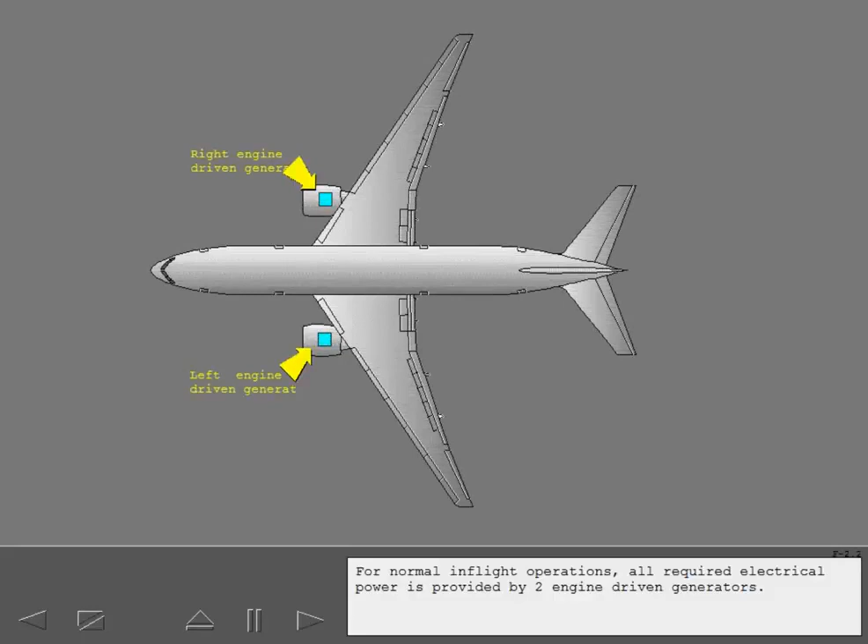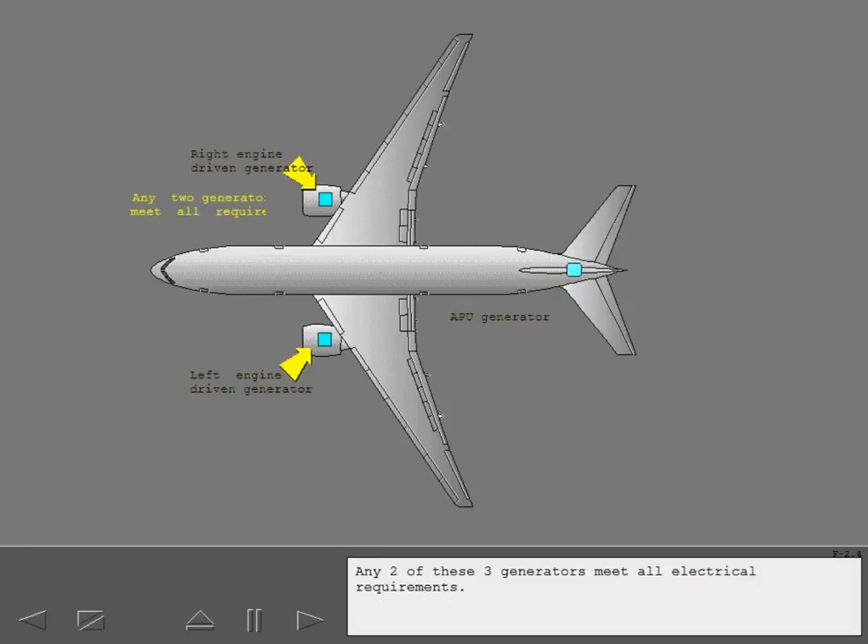For normal in-flight operations, all required electrical power is provided by two engine-driven generators. A third generator, driven by the APU, is available in flight. It is equal in size and capacity to either engine-driven generator. Any two of these three generators meet all electrical requirements.

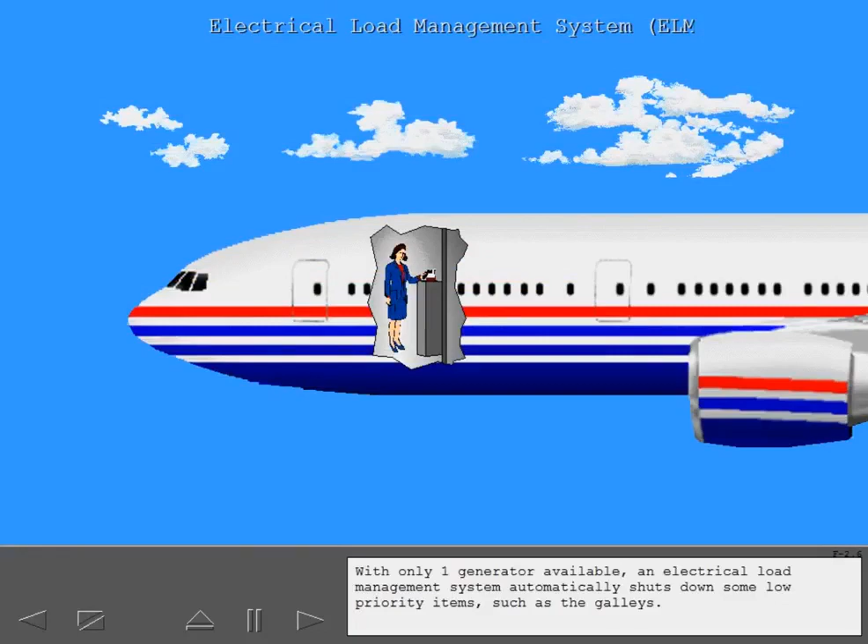With only one generator available, an electrical load management system automatically shuts down some low-priority items, such as the galleys.

Let's use the electrical synoptic to show the main electrical components. Two main AC power buses, left and right, distribute power to all airplane electrical systems. A bus tie and two isolation relays operate automatically to ensure both main buses remain powered at all times.

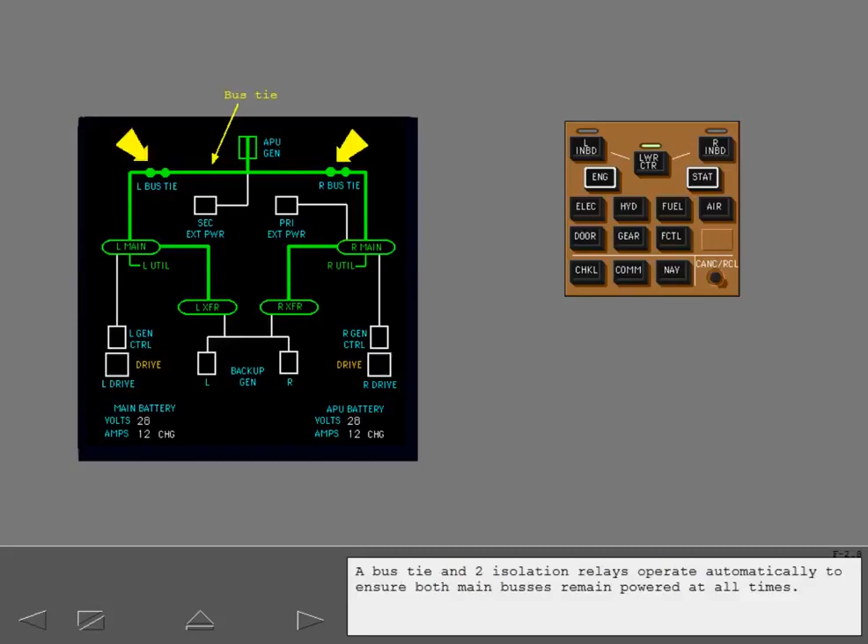Now let's operate the system. Let's begin with the airplane secured and external power disconnected.

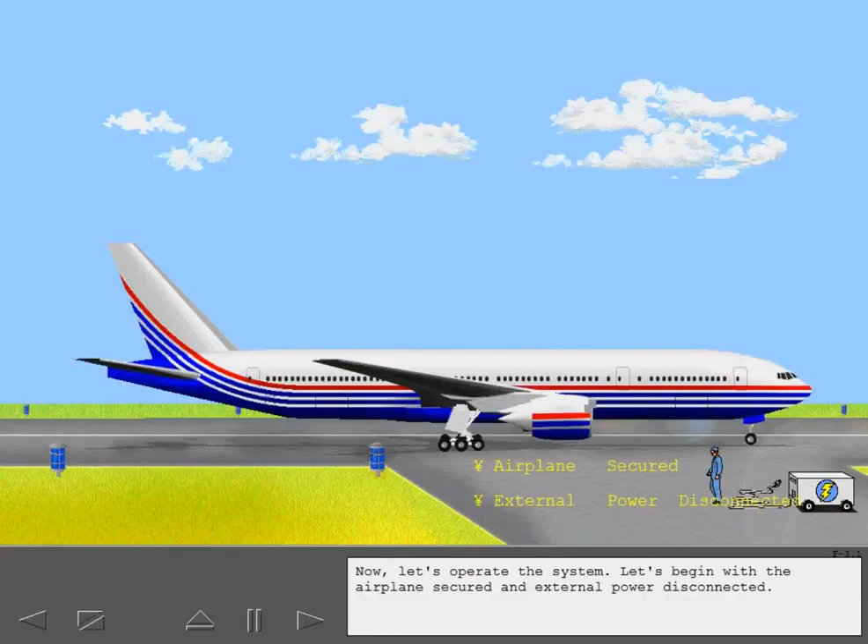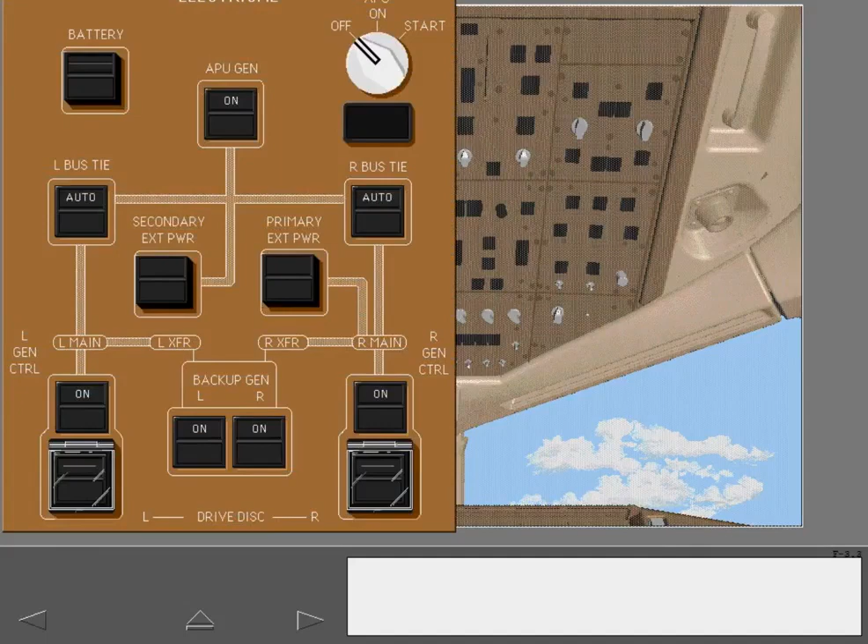Controls for the electrical system are located on the overhead panel. With all electrical power switched off, the main battery still continues to power a few important items through the hot battery bus. These include engine fire extinguisher bottles, the APU fire extinguisher bottle, and the ADIRU, as long as the ADIRU switch is on.

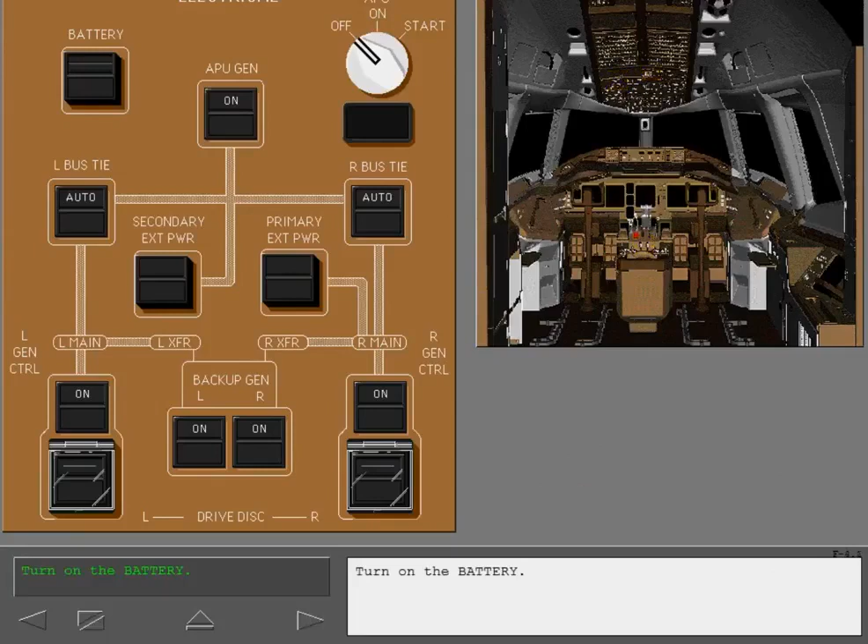Turn on the battery. The on indication in the battery switch appears, and several flight deck annunciator lights illuminate.

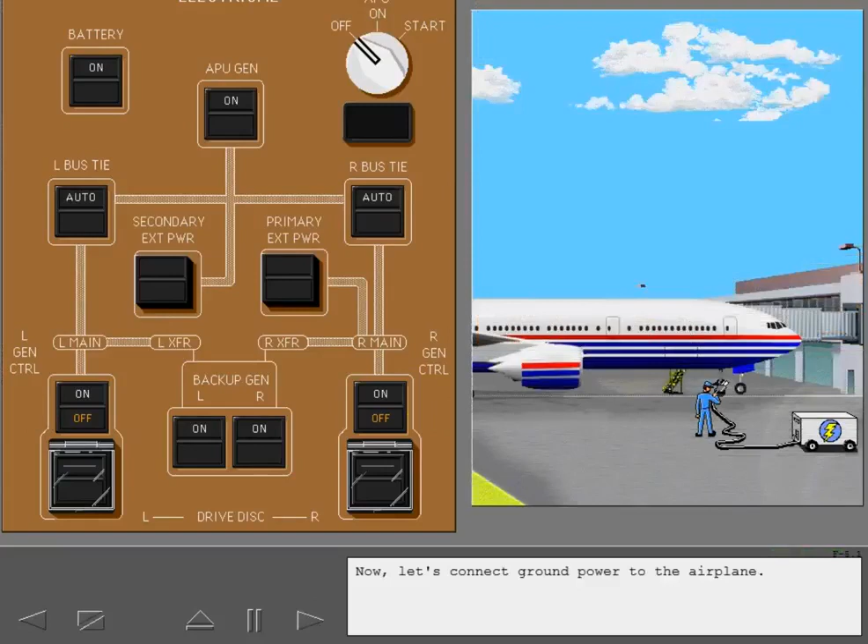Now let's connect ground power to the airplane. There are two external power switches on the electrical panel, primary and secondary. The available light indicates primary external power is connected to the airplane and is of usable quality.

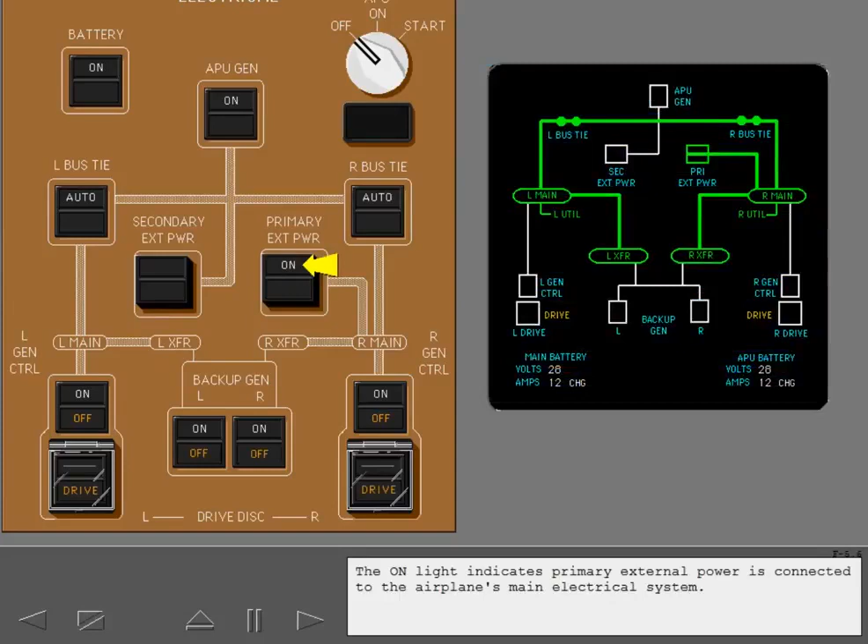Push the primary external power switch to connect external power to the main airplane electrical system. The on light indicates primary external power is connected to the airplane's main electrical system. If no other power source is available, the primary external source powers the left and right buses.

With a single external power source, some non-essential electrical items, such as the galleys, may be unpowered if loads are high.

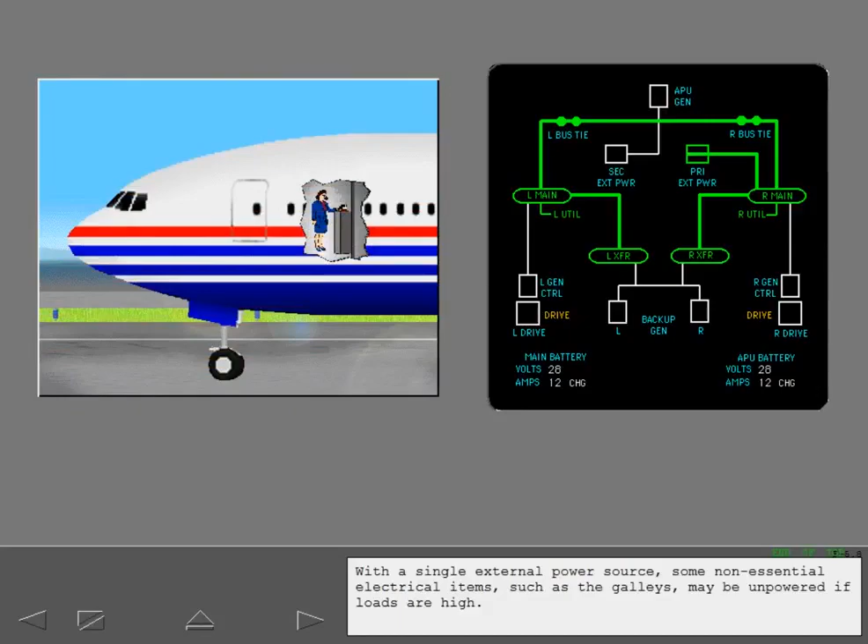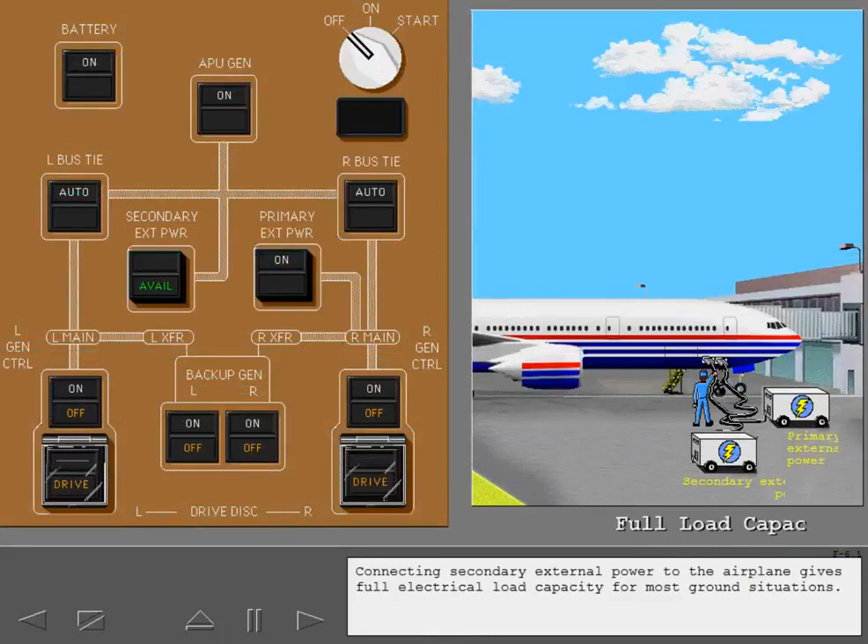Connecting secondary external power to the airplane gives full electrical load capacity for most ground situations. When secondary external power is available and of usable quality, the available light illuminates. Connect secondary external power. Notice the on light illuminates and the available light extinguishes when secondary external power is connected.

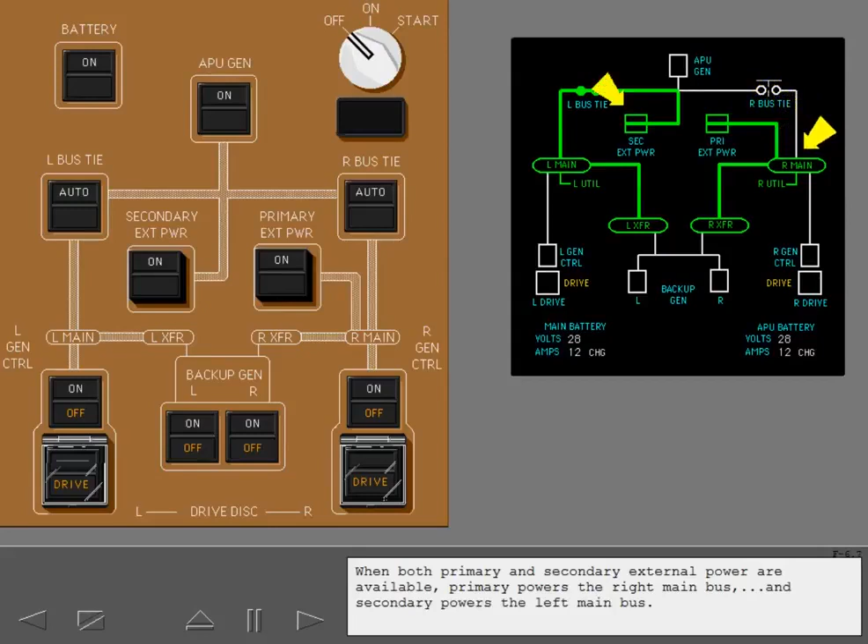When both primary and secondary external power are available, primary powers the right main bus, and secondary powers the left main bus. Any two power sources support full electrical loading.

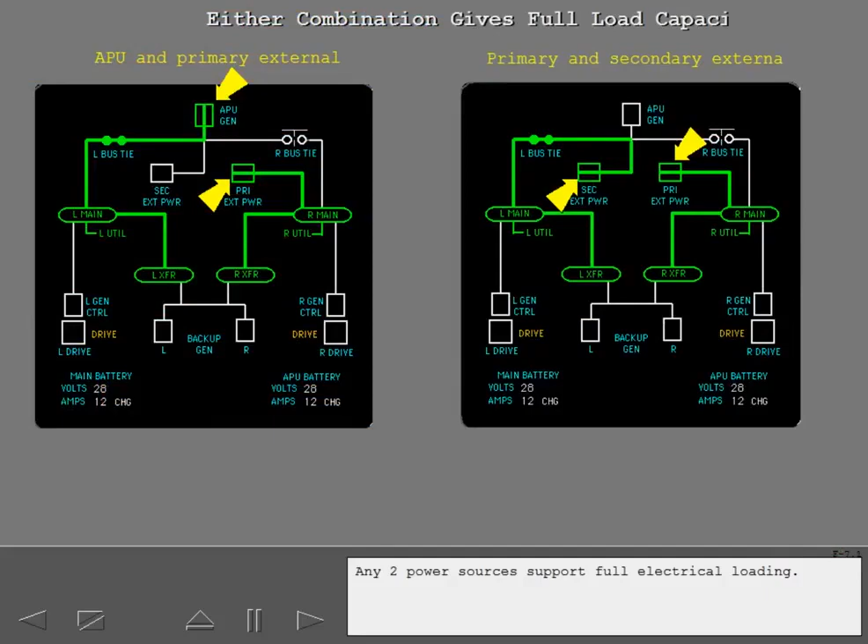In this example, the APU is running but not connected. Let's connect the APU generator to the system. Push the APU generator switch to the on position.

Notice that APU power replaces secondary external power. The external power switch changes to available.

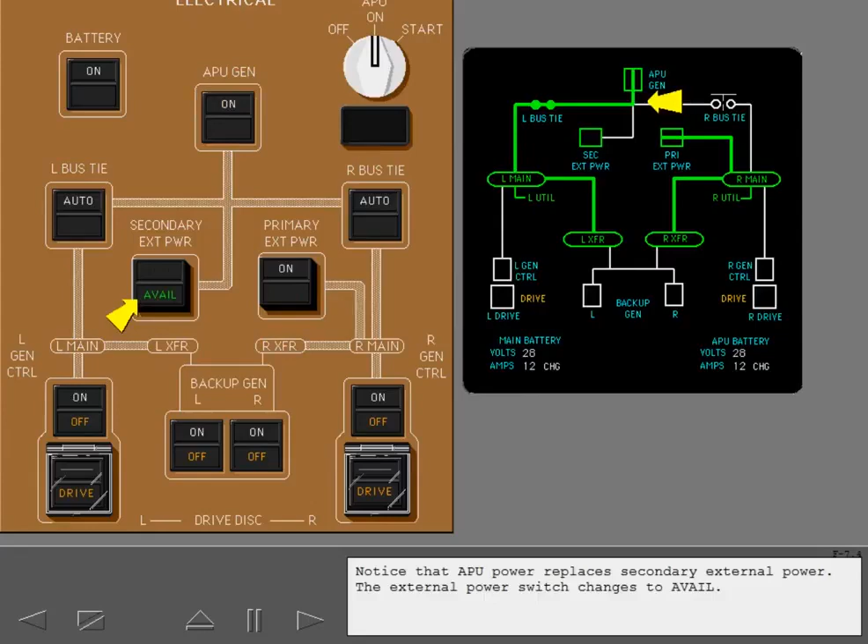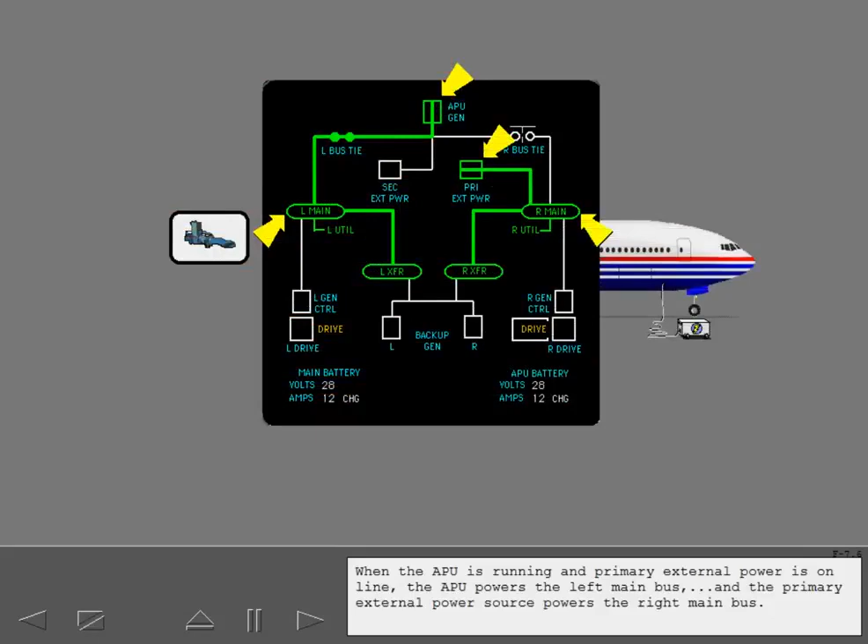When the APU is running and primary external power is online, the APU powers the left main bus, and the primary external power source powers the right main bus.

The APU generator switch is normally left in the on position at all times. In the on position, the APU generator breaker opens and closes automatically.

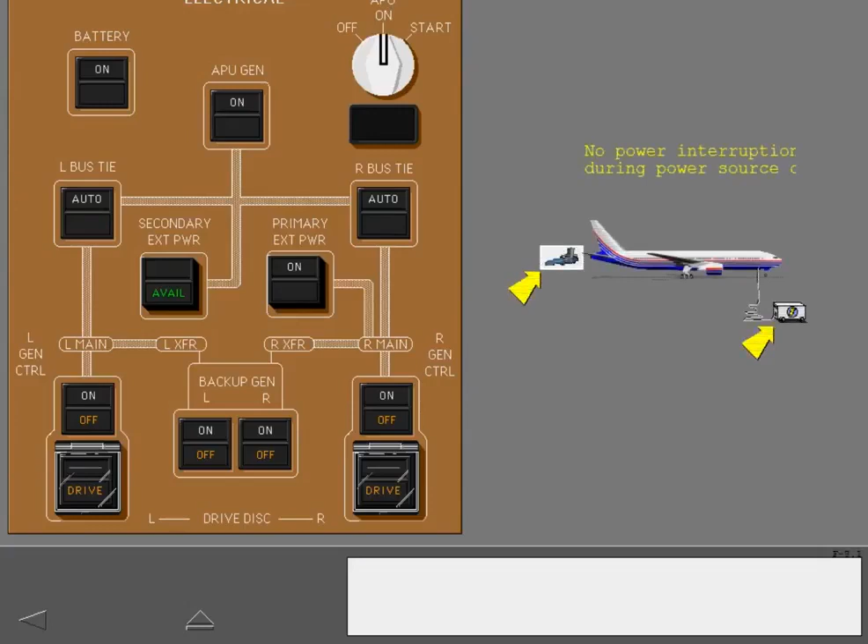There is no interruption of power when switching power sources, except when switching between two external sources.

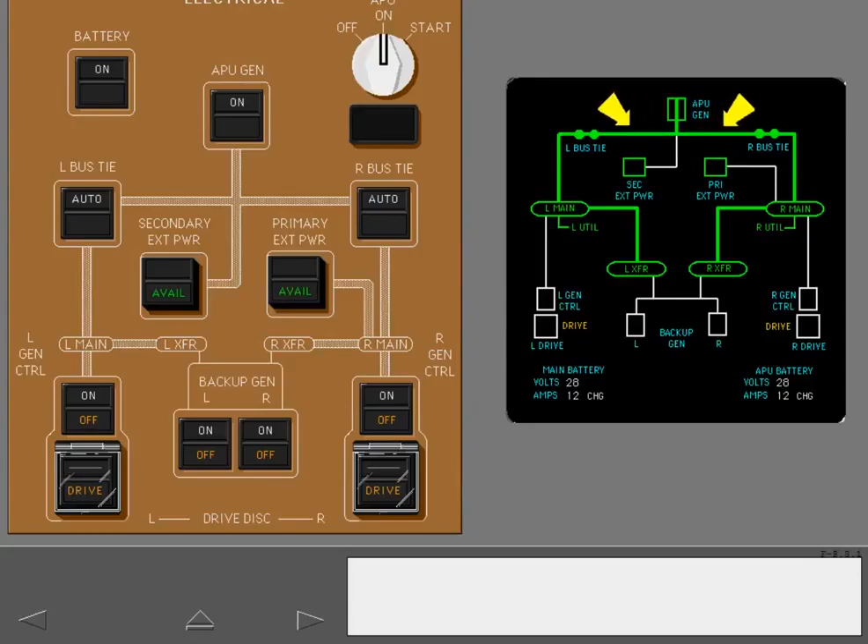Remove primary external power. Notice the primary external power switch changes to available. The APU now powers both buses.

With only one power source, the electrical load management system again sheds non-essential electrical loads.

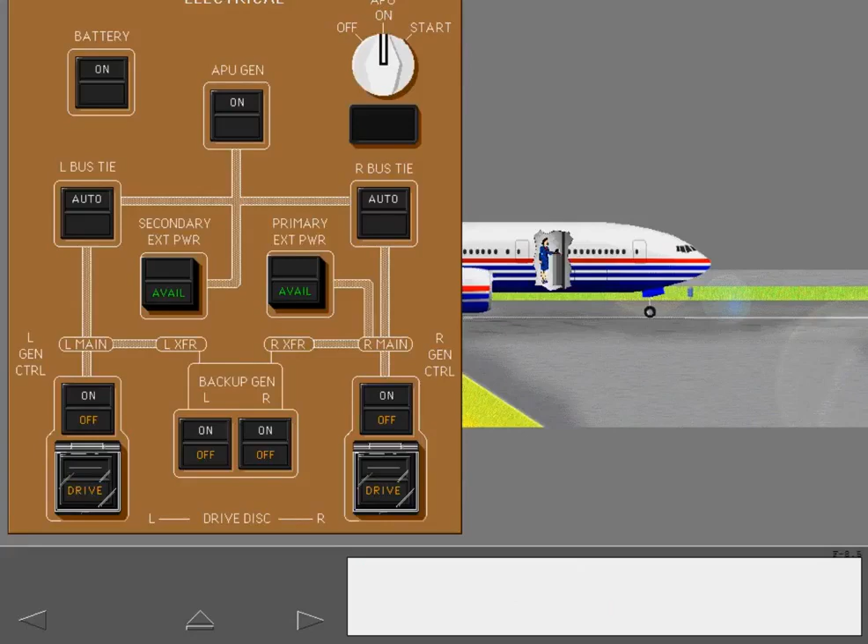Re-establish primary external power. Re-establish secondary external power. The only indication of the change from APU power to external power is the available annunciation changing to an on annunciation in the external power switches.

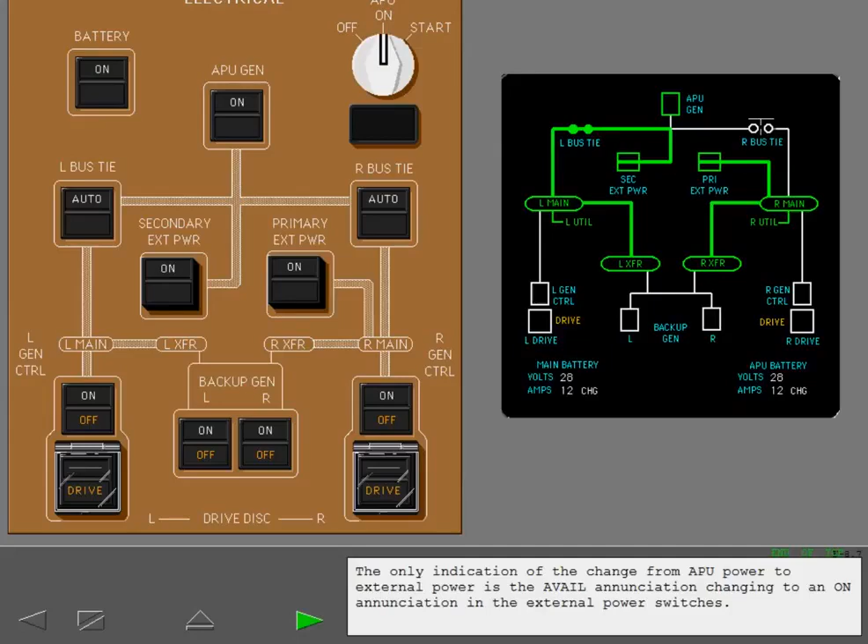Each main engine generator and its drive unit are housed in a single case and share a common oil supply. This combined unit is called an Integrated Drive Generator, or IDG. Each IDG is controlled by a generator control unit, which provides automatic control functions and system protection.

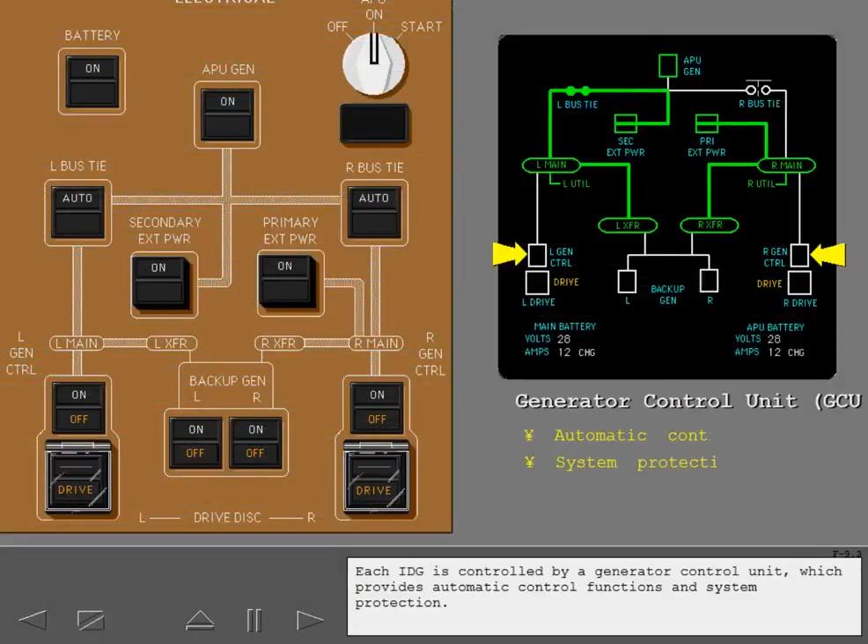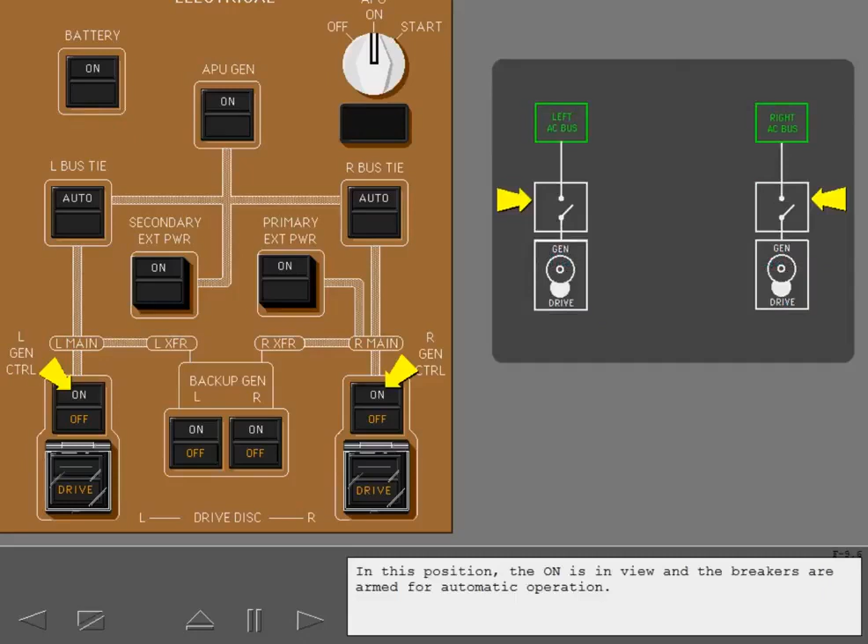The generator control switches automatically connect the IDG to the main buses. The generator control switches remain in the on position for all normal operations. In this position, the on is in view and the breakers are armed for automatic operation.

The off light illuminates when the breaker is open. Note this is different than the APU switch, which only illuminates with a fault or when the switch is turned off.

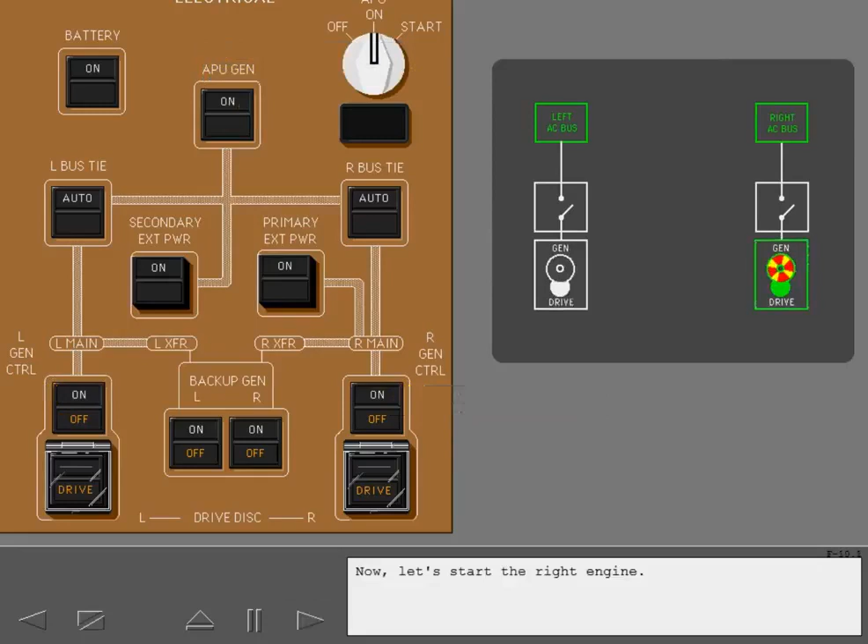Now let's start the right engine. The IDG begins to rotate to operating speed.

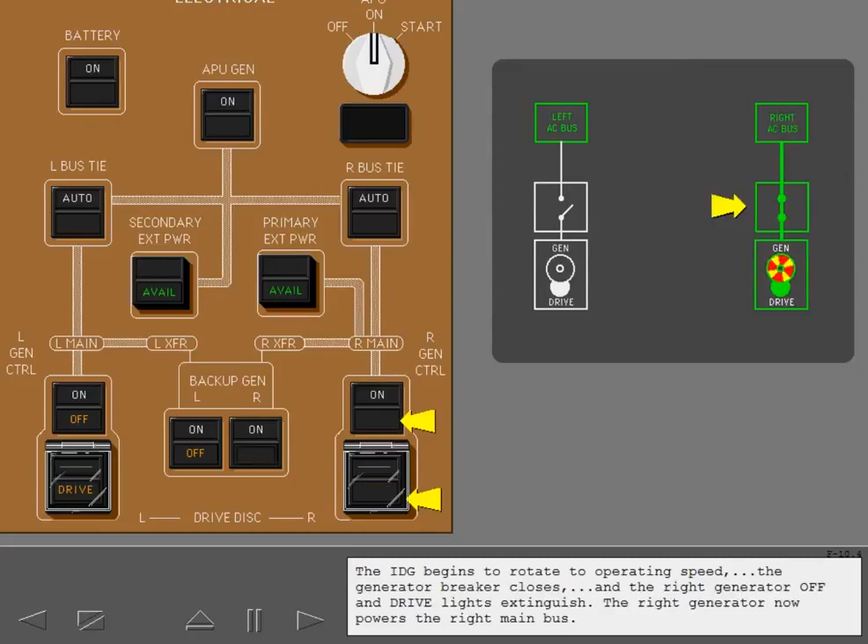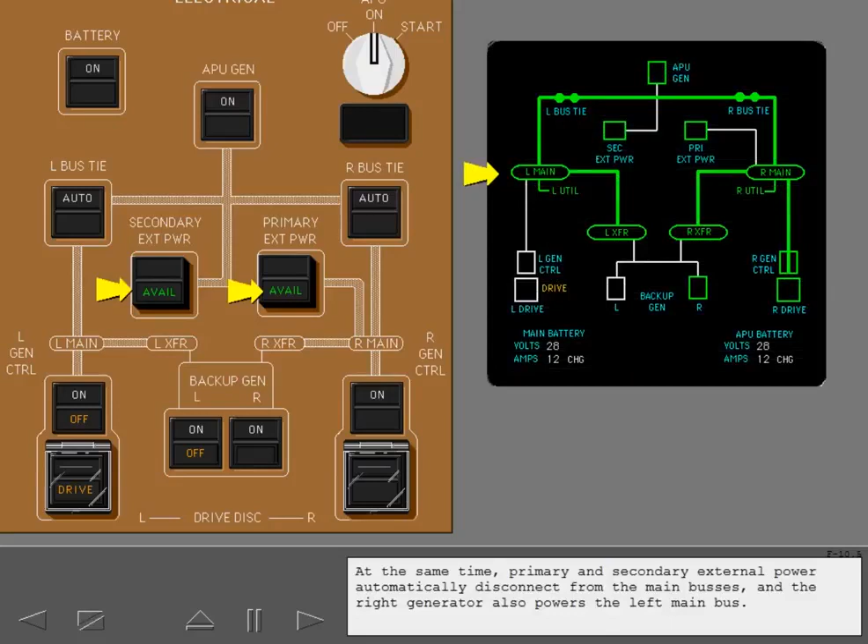The generator breaker closes, and the right generator off and drive lights extinguish. The right generator now powers the right main bus. At the same time, primary and secondary external power automatically disconnect from the main buses, and the right generator also powers the left main bus.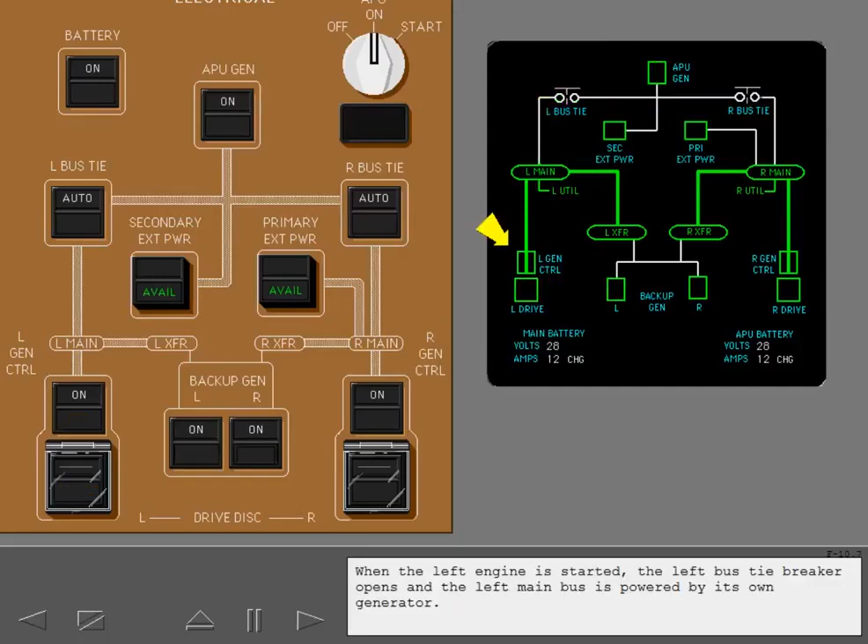After a few seconds with the APU running, APU power replaces right generator power on the left main bus. When the left engine is started, the left bus tiebreaker opens and the left main bus is powered by its own generator.

Each main AC bus powers one utility bus. There are no switches for the utility buses.

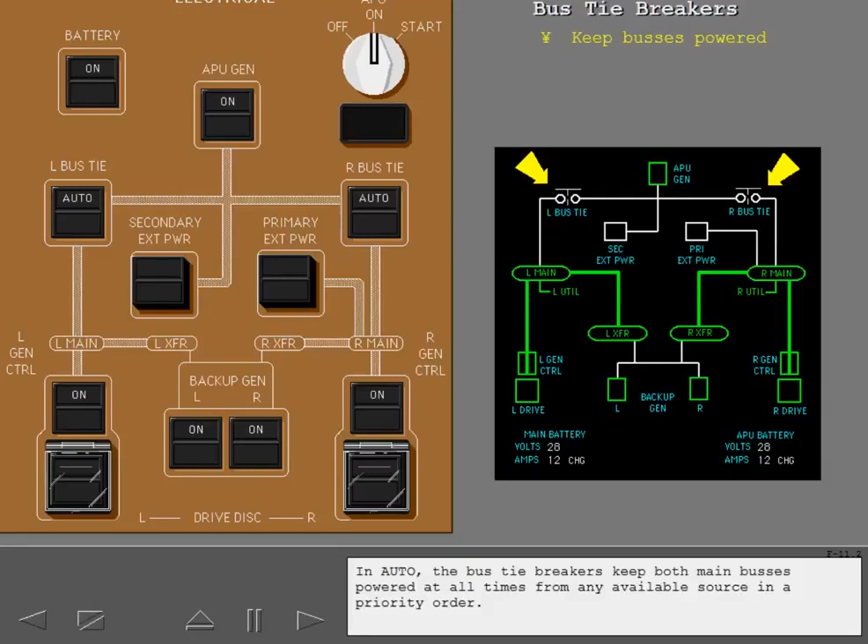For normal operation, the bus tie switches are left in auto. In auto, the bus tie breakers keep both main buses powered at all times from any available source in a priority order.

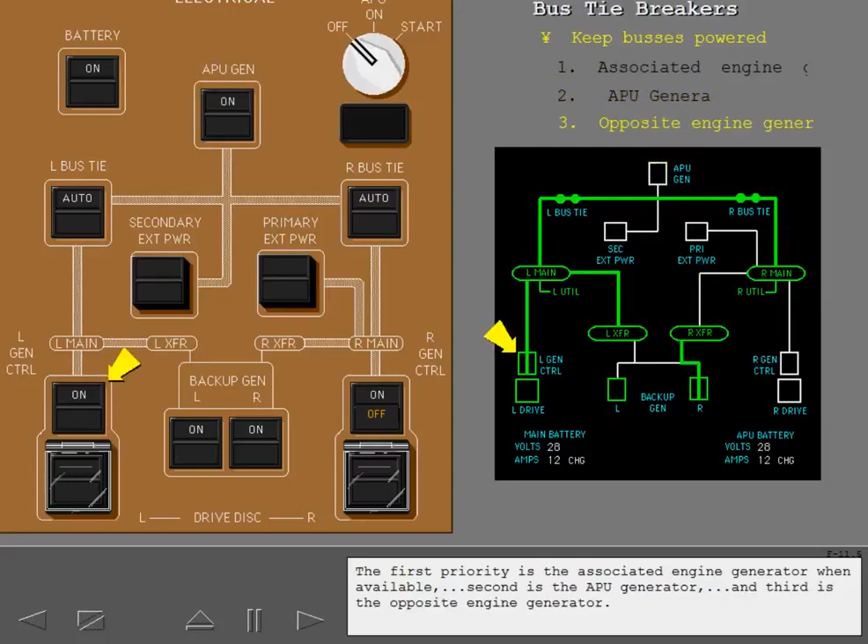The first priority is the associated engine generator when available. Second is the APU generator. And third is the opposite engine generator.

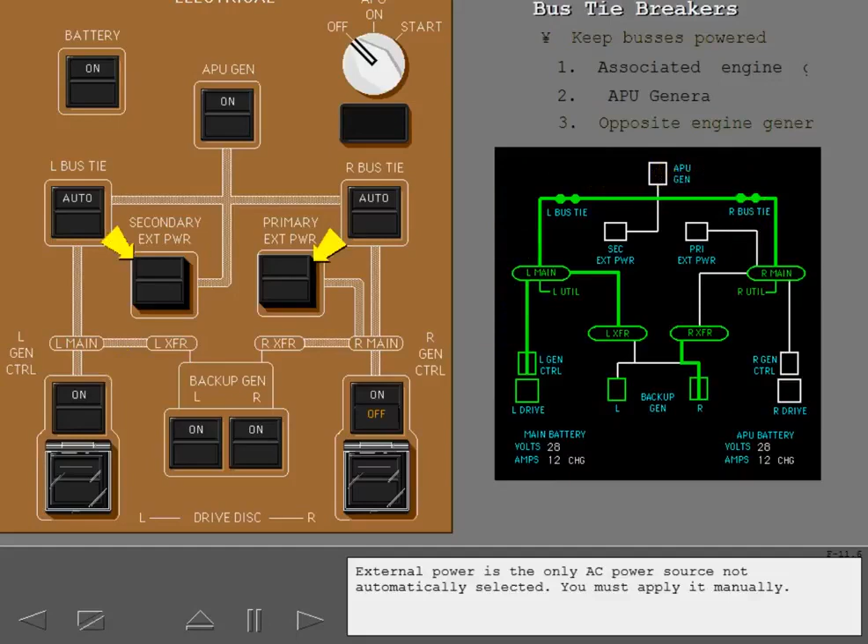External power is the only AC power source not automatically selected. You must apply it manually. Note that both bus tiebreakers are open whenever the IDGs are powering their respective buses.

Push the left bus tie switch to position it off. Notice the auto annunciation disappears and the isolation light illuminates. The left bus tiebreaker is locked open with the switch off.

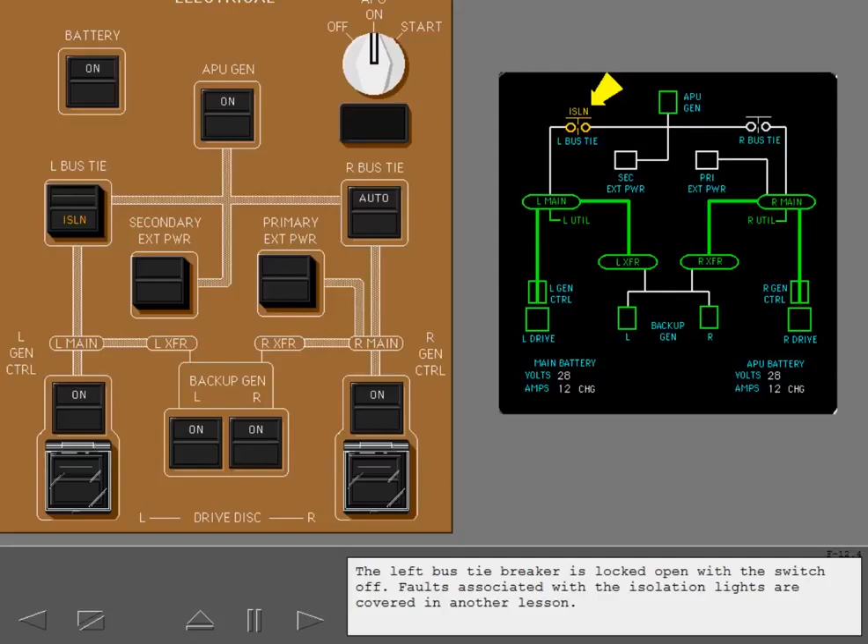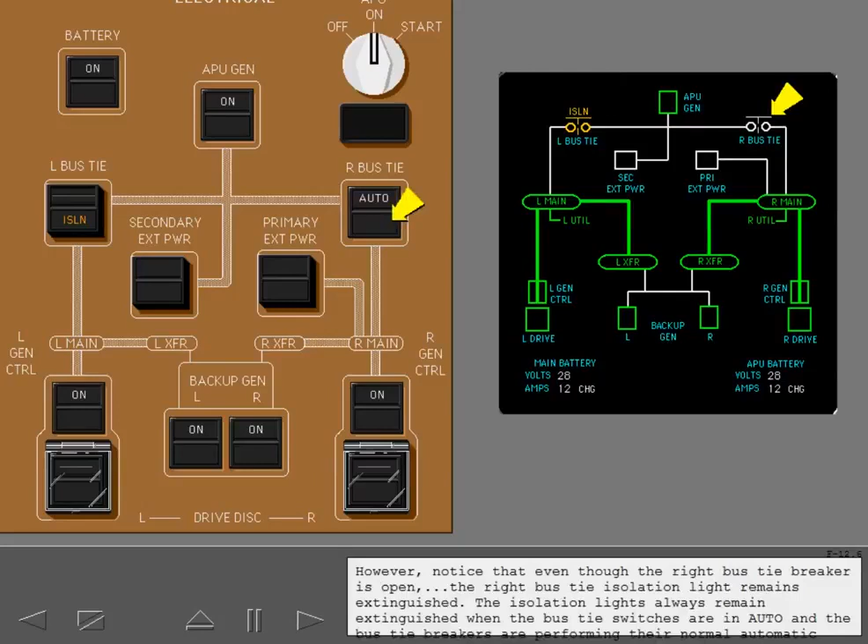Faults associated with the isolation lights are covered in another lesson. However, notice that even though the right bus tiebreaker is open, the right bus tie isolation light remains extinguished. The isolation lights always remain extinguished when the bus tie switches are in auto and the bus tie breakers are performing their normal automatic operation.

Reset the left bus tie switch and notice that auto is again annunciated. Both engines are now running and both engine generators are powering their associated bus. The only indication on the electrical panel is that the generator off lights and generator drive lights are extinguished.

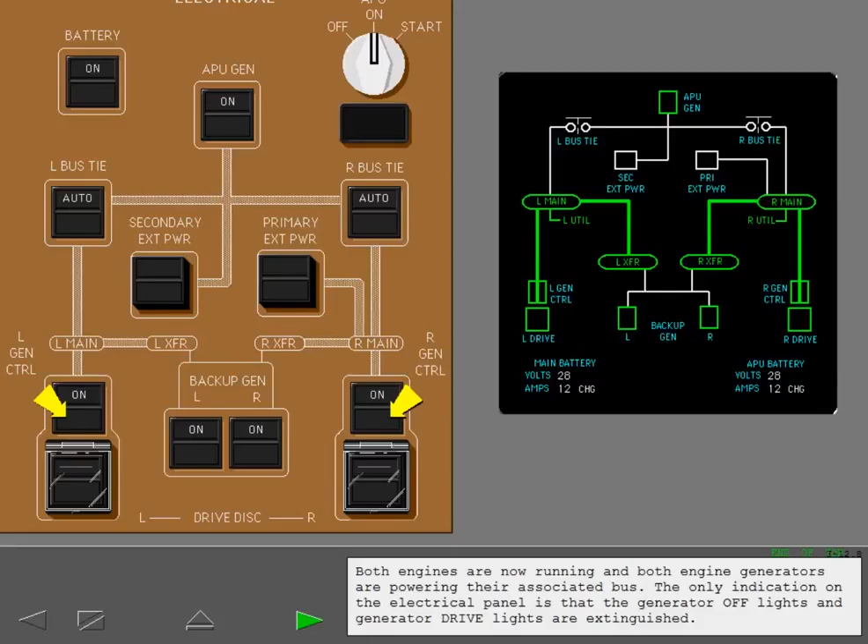The electrical panel is now configured for flight. External power is disconnected. Notice in this normal flight configuration, all electrical panel lights are extinguished. The APU may be shut down.

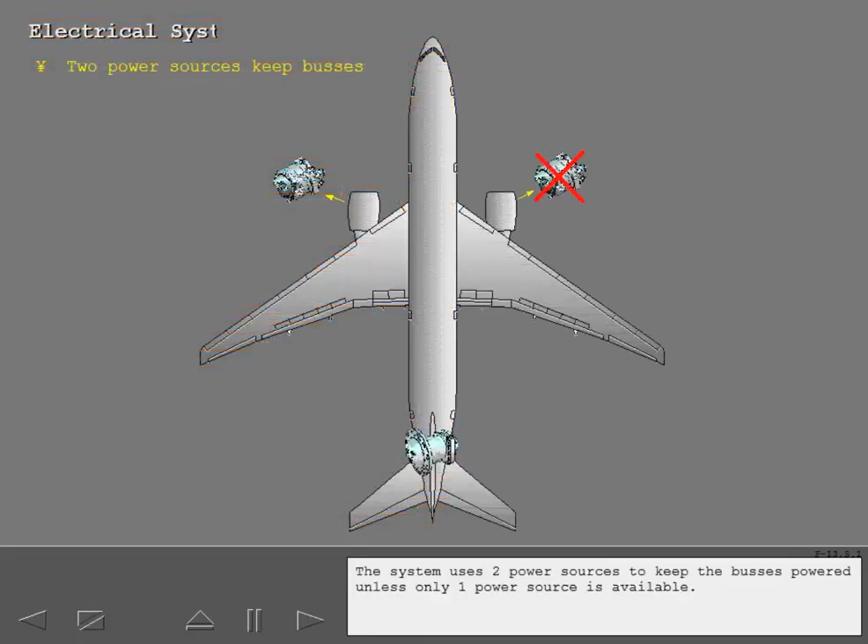The system uses two power sources to keep the buses powered unless only one power source is available. Any one generator has sufficient capacity to supply all essential flight loads.

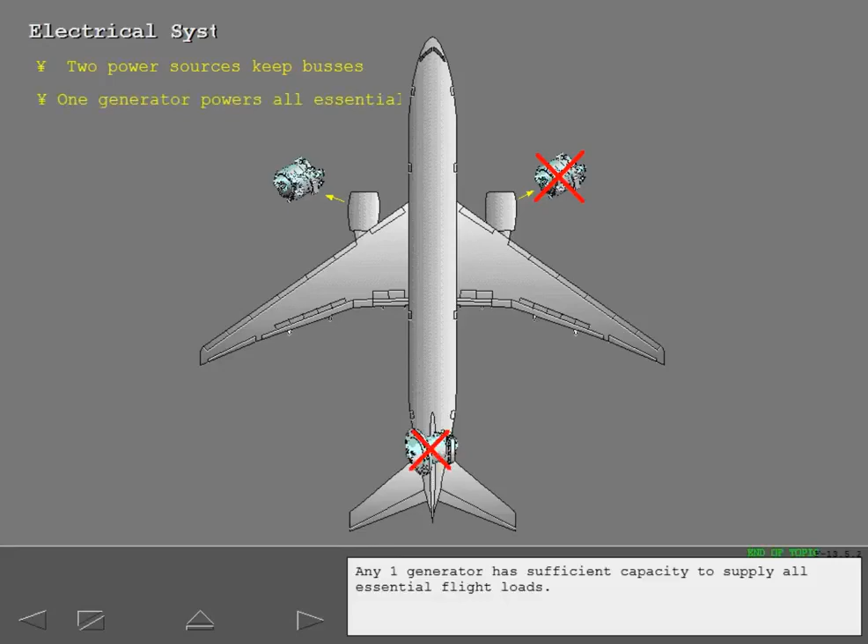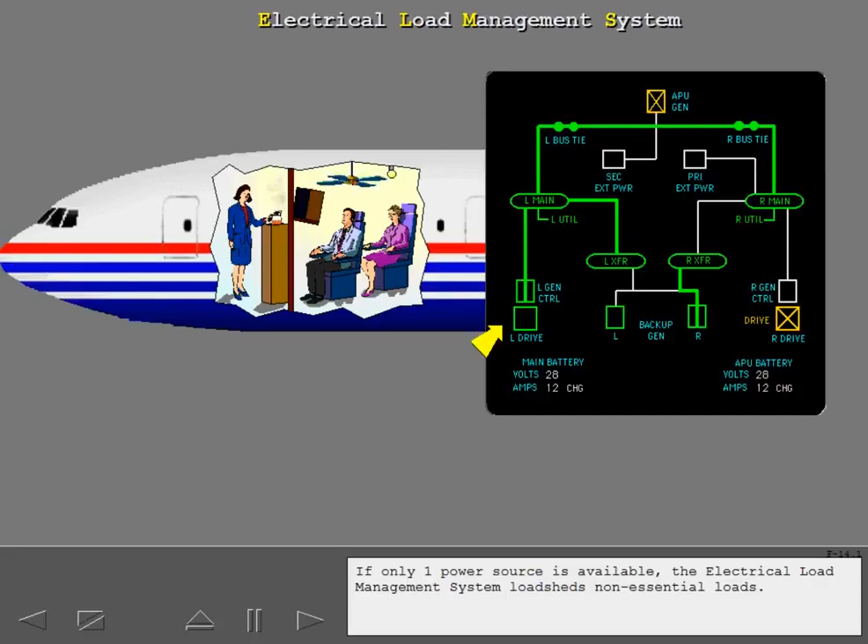If only one power source is available, the electrical load management system load sheds non-essential loads. First, galleys and galley chiller loads are shed, and then left and right utility buses. The utility buses power passenger entertainment systems and recirculating fans.

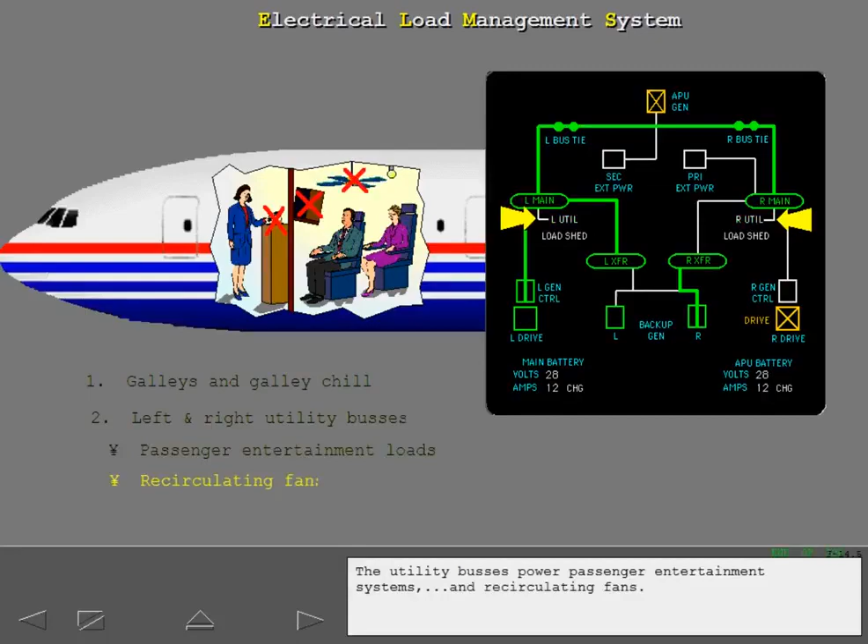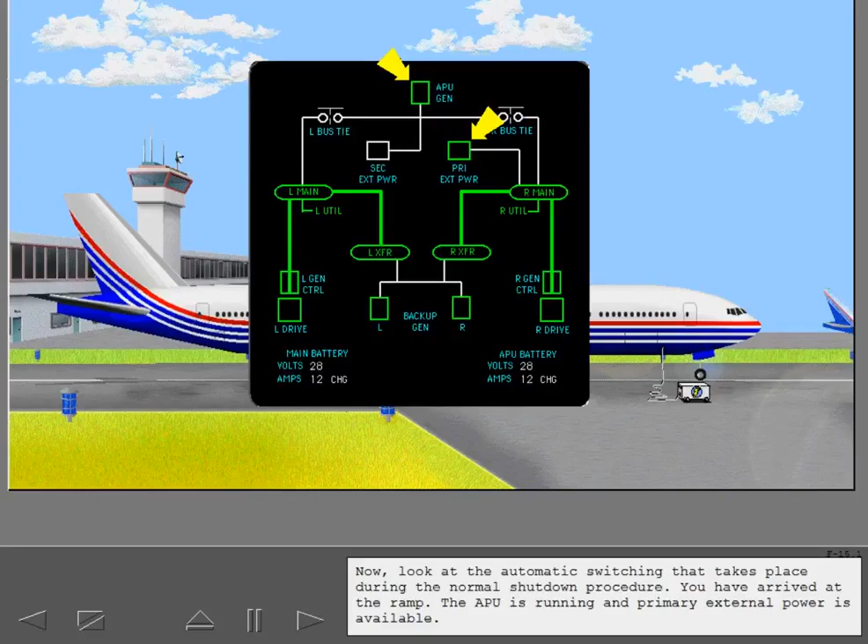Now look at the automatic switching that takes place during the normal shutdown procedure. You have arrived at the ramp. The APU is running and primary external power is available. Let's shut down the left engine.

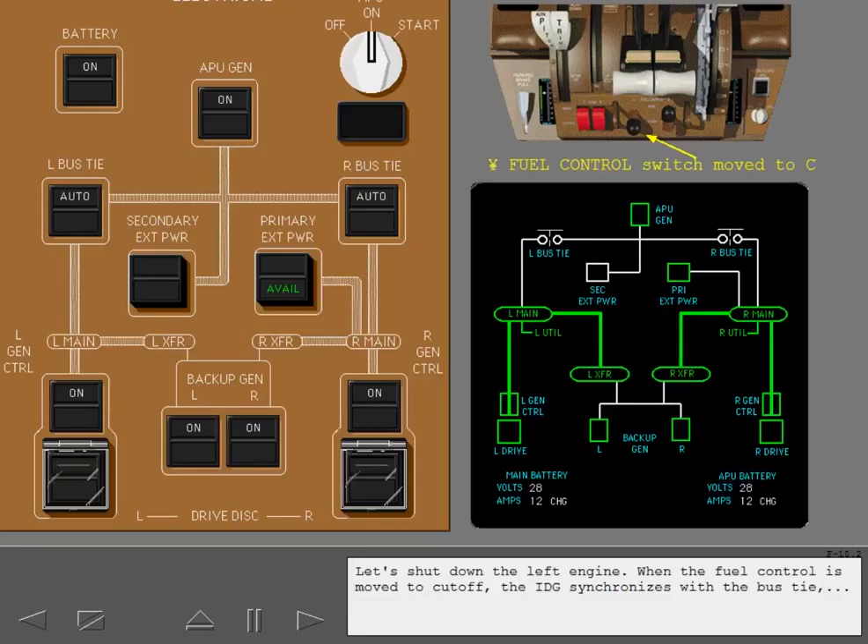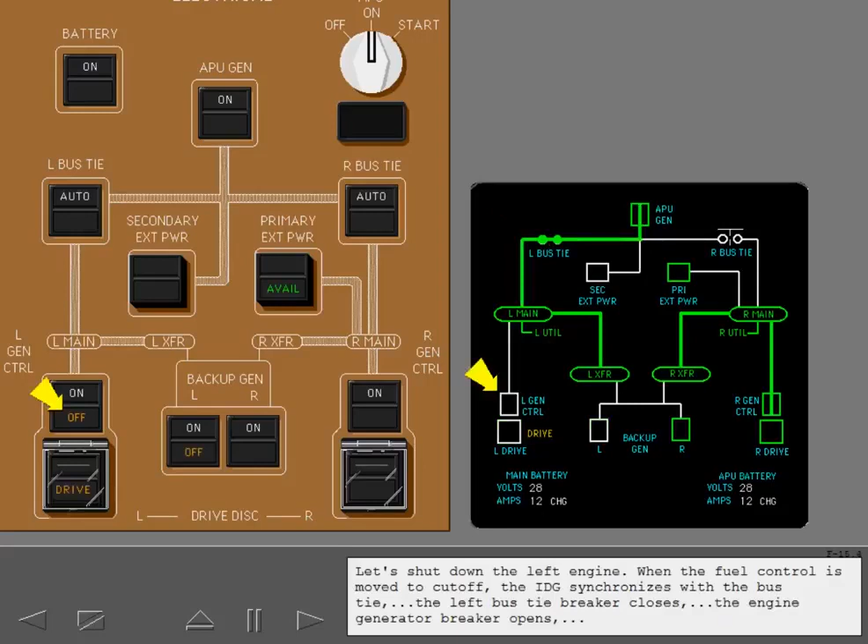When the fuel control is moved to cutoff, the IDG synchronizes with the bus tie. The left bus tie breaker closes, the engine generator breaker opens, and the APU powers the left bus.

The right bus is still powered by the right engine generator. When the right engine is shut down, the right bus tie breaker closes, and the APU automatically powers the right main bus.

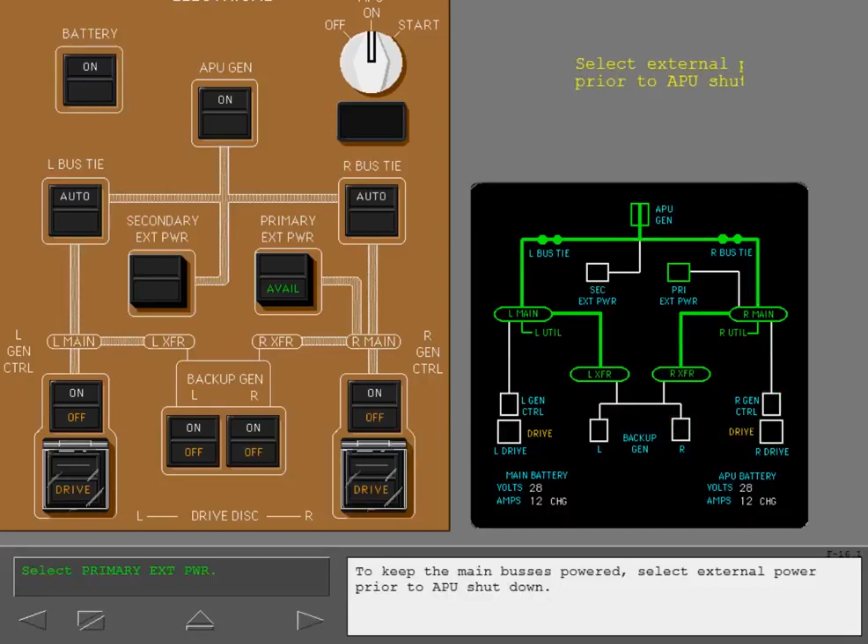To keep the main buses powered, select external power prior to APU shutdown. Notice that primary external power now powers the right main bus, and the APU continues to power the left main bus. Now turn the APU off.

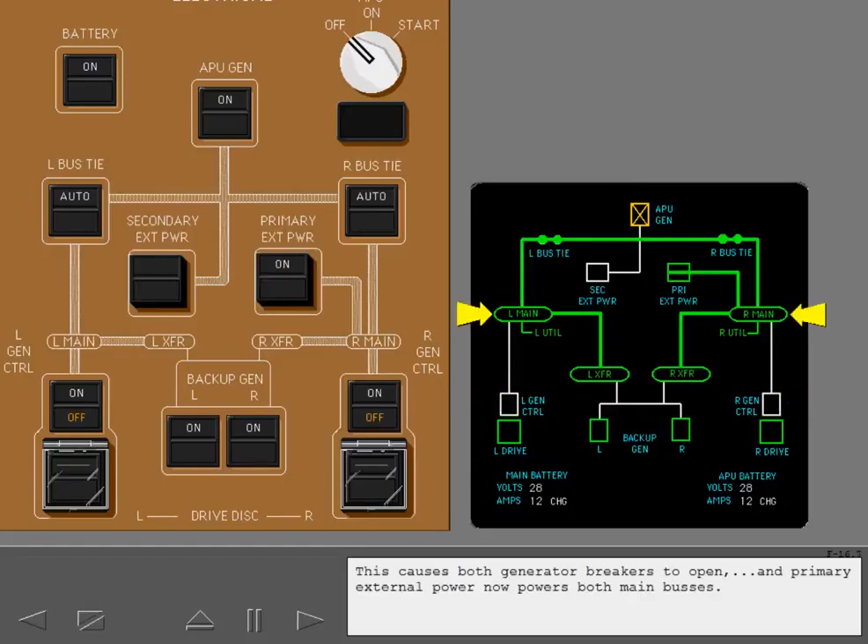If the APU is not available, select primary external power prior to engine shutdown. Select primary external power. This causes both generator breakers to open, and primary external power now powers both main buses.

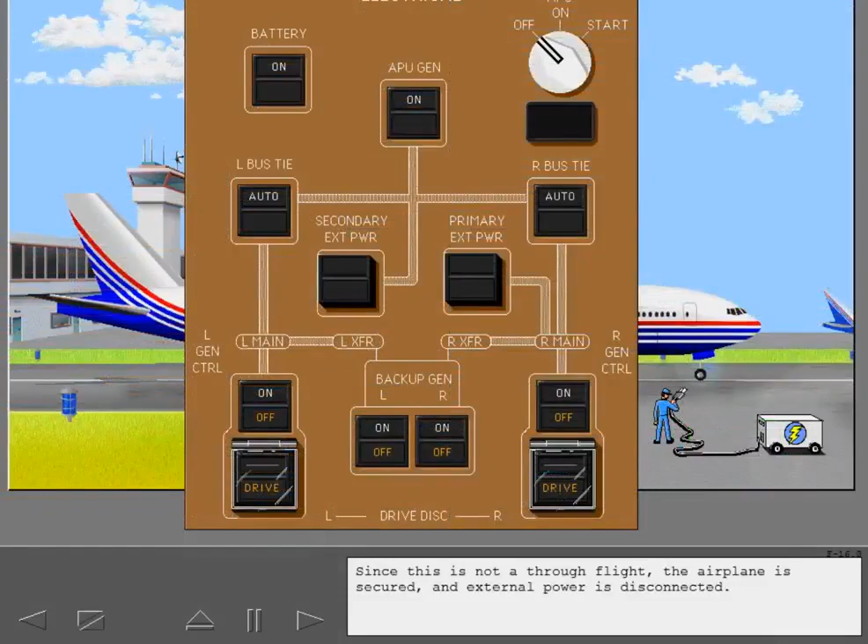Since this is not a through flight, the airplane is secured and external power is disconnected. The main buses are now off. The only remaining source of power is the main battery.

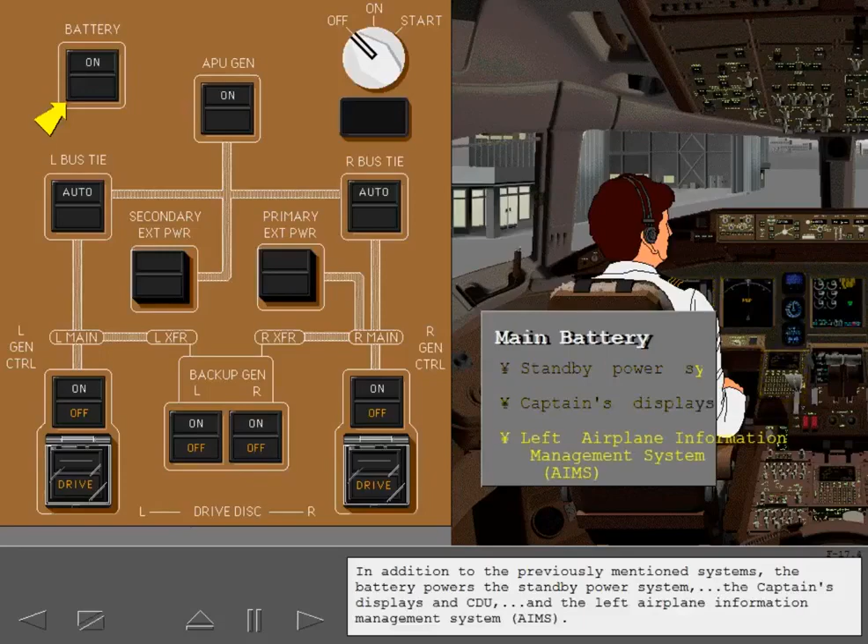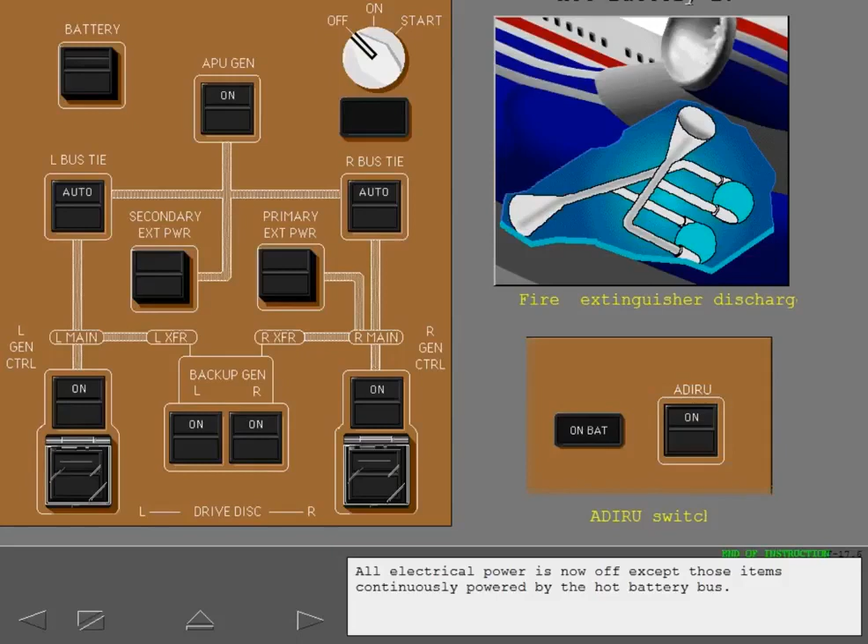In addition to the previously mentioned systems, the battery powers the standby power system, the captain's displays and CDU, and the left airplane information management system, AIMS. Now complete the power down. Turn off the battery. All electrical power is now off except those items continuously powered by the hot battery bus.